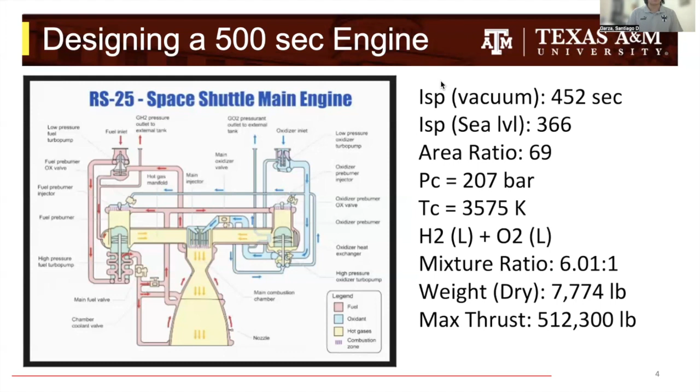Now, to help design this 500-second specific impulse engine, we used a rocket propulsion analysis software, and using the same mixture ratio of hydrogen and oxygen and maintaining the area ratio of 69 between the throat and the exhaust.

And it was said that we had to pre-burn the hydrogen and oxygen temperature to about 3,000 Kelvin, raise the chamber pressure to 500 bar, and raise the chamber temperature to 3,790 Kelvin. Now, even through all this, we were only able to achieve a specific impulse of 475 seconds, which means we need to find an alternative to increase ISP other than pressure and temperature changes.

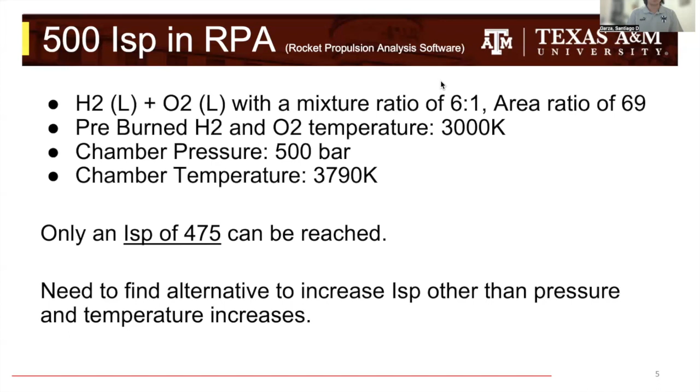So a little bit of background about the analysis we will be doing. A nozzle is defined as maximizing thrust by efficiently converting the high pressure, high temperature exhaust gases into high velocity exhaust streams. So a basic diagram of a rocket nozzle is shown on the top left.

Basically, we have stagnation pressure and temperature in the combustion chamber. And assuming we don't have any significant pressure changes or temperature changes or velocity values between the end of the combustion chamber and the beginning of the nozzle, we can assume that the pressure and temperature of the combustion chamber are at stagnation, and also are at the same stagnation values when entering the nozzle.

And so then the gases pass through the throat where they accelerate to Mach 1, and at these supersonic speeds, they accelerate even further due to the diverging section of the nozzle. And they will accelerate to a specific pressure at the exhaust and velocity as well as temperature. And depending on how these pressures and temperatures compare with the ambient conditions, that can help us understand the performance and efficiency of our engine.

Now, one of the variations of rocket nozzles that we chose to analyze is called the expansion deflection nozzle. Basically, what this means is that flow is deflected by a plug and is forced to stick to the nozzle walls.

And the presence of a free jet boundary to the expansion process lends a kind of self-adjustment to back pressure variations. Basically, what it's saying is that the way that flow behaves as it moves through the nozzle is dependent on what the ambient conditions are.

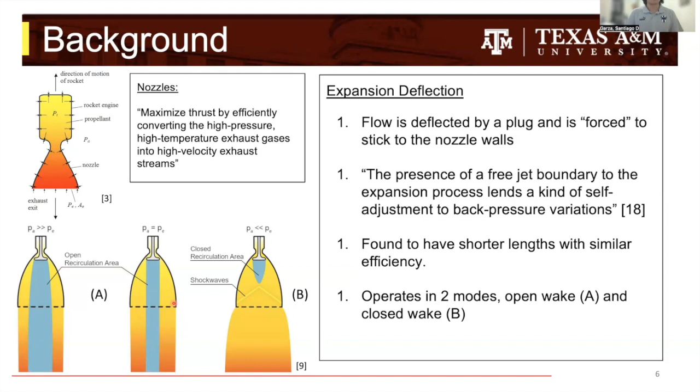So the objective of this research is to determine whether the expansion deflection nozzle can actually lead to a better design for a 500-second engine. We've decided to pull this component out because it appears that this is one of the easier components to change and implement and get an instant response and efficiency metrics.

So what we're going to do is compare the expansion deflection and bell nozzle performances for both a vacuum and then the expansion deflection nozzle at sea level. We're also going to investigate the effects of our specific pintle design.

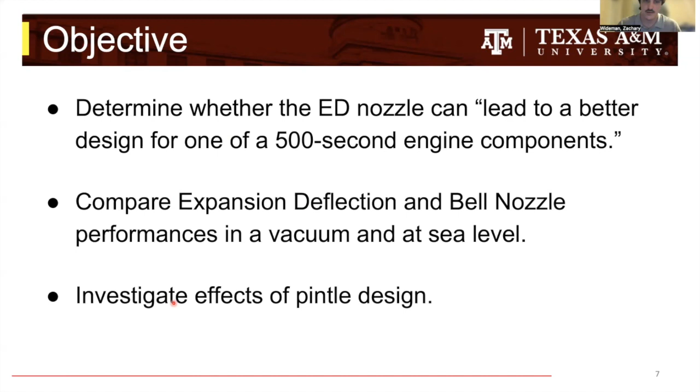As far as literature pertaining to the expansion deflection nozzle, one of the first analyses done was by Robert Wasko in a 1960s NASA report. Wasko determined the nozzle was not as efficient as expected, and in fact it was just as performant, as actually less performant than a conical nozzle at sea level and vacuum.

It was not altitude compensating, whereas a plug nozzle was. Noting that it was only operating in closed wake, which would explain that poor performance and lack of altitude compensation.

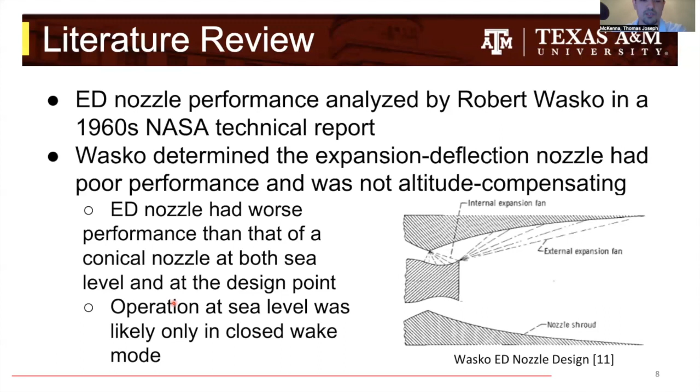However, in 2002, Taylor published his dissertation providing an exploration into different expansion deflection nozzle contour designs. In particular, he talked about the works of Wasko, Rao, and Mueller. Wasko and Mueller use very similar nozzle designs, as you can see at the bottom two in the picture. They have a very low throat angle, and they use an ideal contour.

Both of these nozzles operate in closed wake mode. They are not very efficient and do not provide any altitude compensation. Taylor makes note that it's not surprising that in his analysis, Wasko found that it was not performant and it was not altitude compensating.

In fact, he referred to the geometry as just peculiar and not allowing it to operate in open wake mode. Whereas - sorry, can you go back to the previous slide? Yeah, the Rao-type nozzle with the rounded pintle and the optimized contour would allow for operation in open wake.

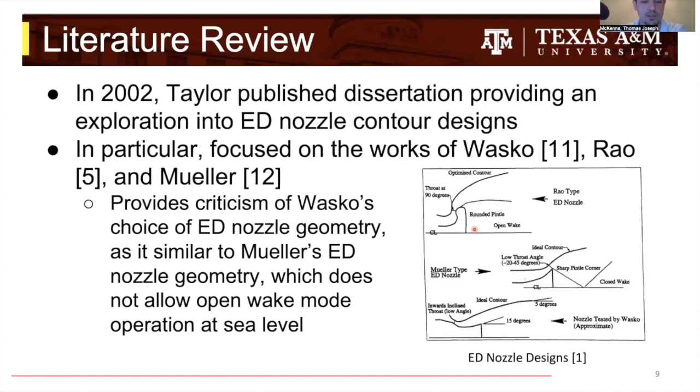In particular, the criticism Taylor had for the Wasko geometry was the low pintle separation angle. It was even lower than that of Mueller's geometry, which is why it was very peculiar. The throat was also considerably upstream from the point of separation, and all of this resulted in a decreased open and closed wake base pressure.

Overall, due to the fact that the Mueller nozzle was not intended to operate in an open wake mode, it's not surprising that the Wasko nozzle only operated in closed wake and was not performant or altitude compensating. So it casts doubt on the notion that expansion deflection nozzles are not performant or cannot be performant. In his dissertation, he talks about optimizing the contour to actually get it to operate in open wake and provide that altitude compensation.

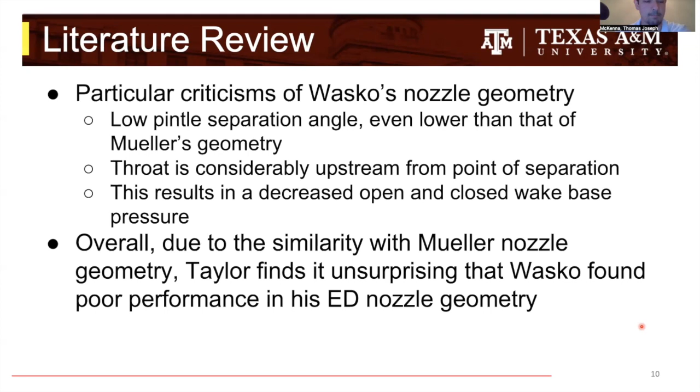As I said before, Rao is one of the design philosophies for the expansion deflection nozzle geometries. In particular, Rao utilized his established bell length optimization, so you could possibly reduce up to a 50% decrease in length, which could present a reduction in mass of the nozzle.

He made use of a much larger throat angle, about 75 to 90, all the way up to 90, which was much higher than that of the Mueller or the Wasko nozzles. Overall, what this would allow for is a longer operation in open wake mode.

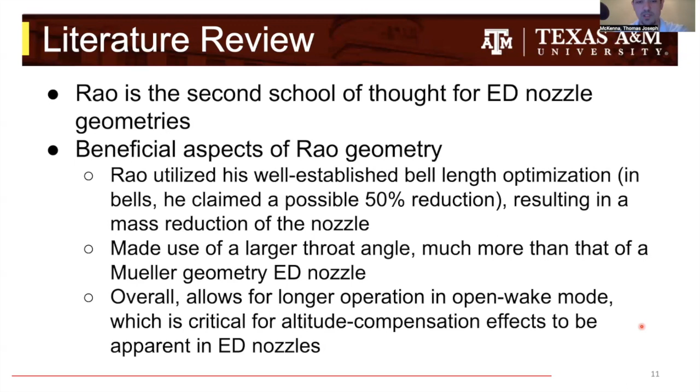And it is critical that this happens because the expansion deflection nozzle needs it to operate in open wake for there to be altitude compensation.

So our geometry methodology, this is our overview. We mathematically designed our nozzles in MATLAB and sketched them as a contour. Those contours were then imported as a collection of points into SolidWorks, where we could mold the model, scale it to its appropriate length and units, and then mirror it to get a full planar nozzle. That's where we went different from typical research.

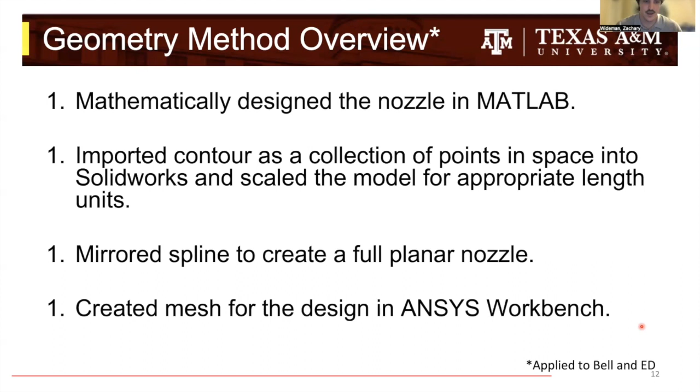A lot of previous research did axisymmetric CFD, whereas we're doing a full nozzle CFD. And then we created a mesh for this full nozzle in the ANSYS workbench.

So for our exhaust contour, we did a thrust optimized parabolic nozzle, which is a quadratic Bezier curve. Here it's shown from Rao, who approximated this. As you can see here, here's your throat, and then you come up to this endpoint, which is your theta n, the angle going into the curve, and theta e is your exit angle.

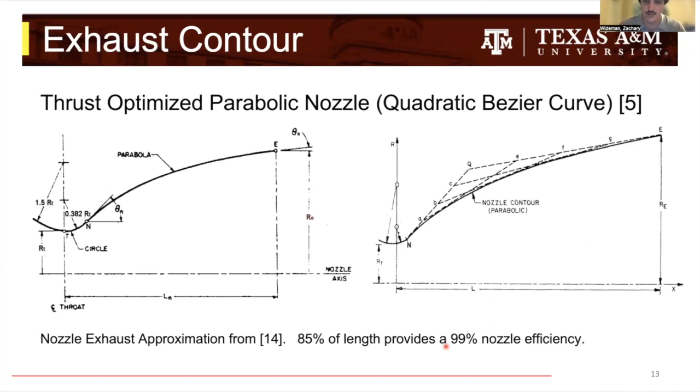What he found is that 85% of the length of a bell nozzle provides 99% of your nozzle efficiency. So we took that metric.

Here are the equations we generated our curve with. We know N points because we know the throat exit, and we know E from the length approximation given by Rao, and our throat area that we chose. The M1 here is defined by the tan of our angle going into N, and M2 is the tan of our exit angle. Using these equations, we can generate a curve.

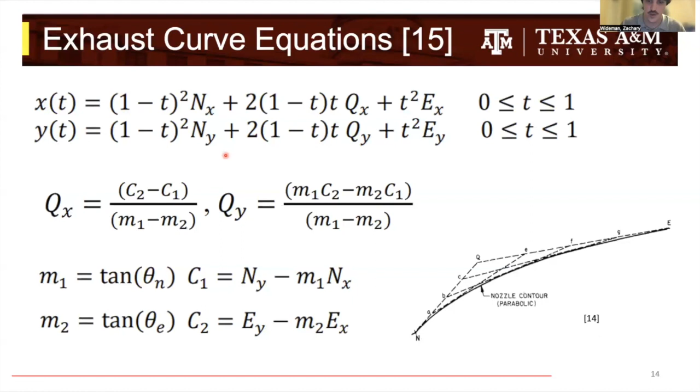So here's our bell contour design. As you can see here, the blue is our converging section, and then it goes into our diverging section.

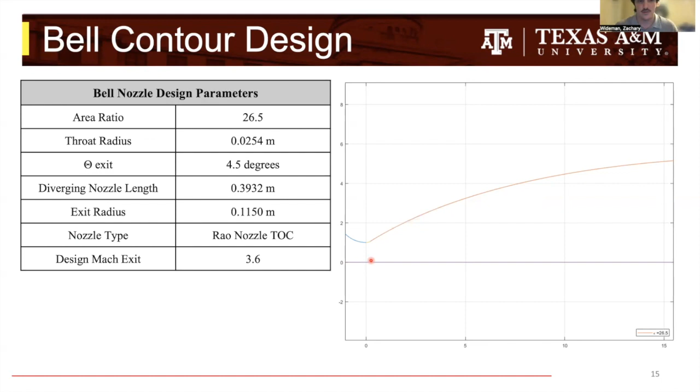Our area ratio for the bell contour is 26.5. The radius is 0.0254, our exit theta is 4.5 degrees, the length of the whole nozzle from the throat on is 0.3932, and we have an exit radius of 0.1150. The design Mach is 3.6.

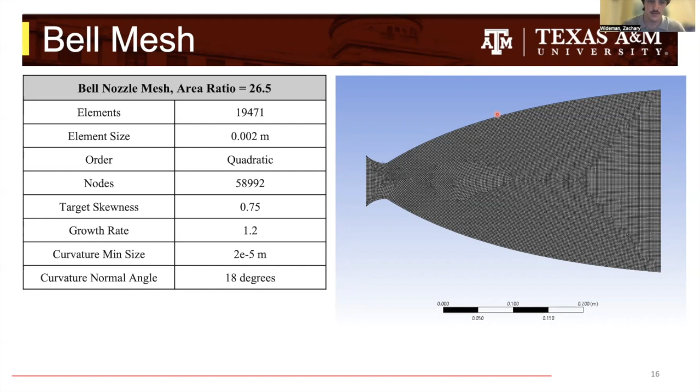So next, here's our mesh. This was created in ANSYS workbench, has around 19,000 elements, 59,000 nodes. It's quadratic elements, our skewness or quality was 0.75, and our element size is 0.002 meters.

And then for the expansion deflection design, this was a little more complicated. This image is taken from Taylor's dissertation. This is where we also took our optimal design, as we looked at his graphs of thrust coefficient for different radius of the pintle, radius of the walls, and these entry angles. That's how we designed ours.

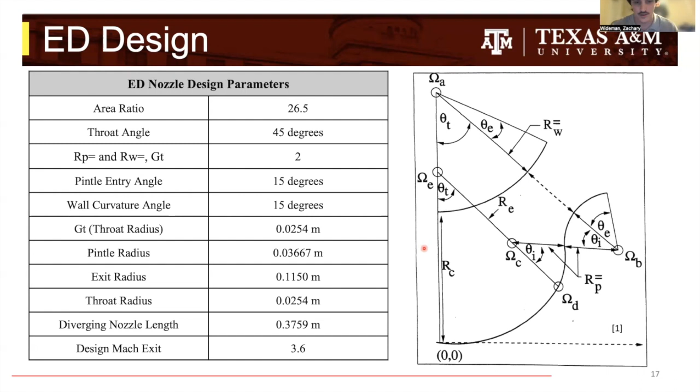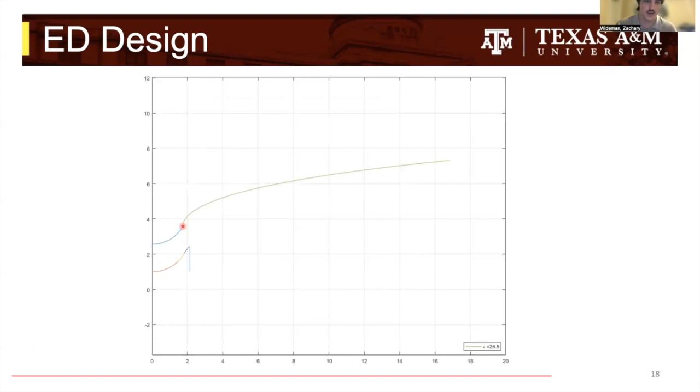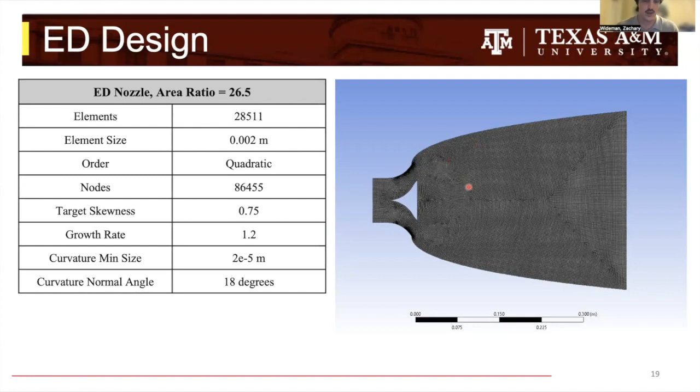So here's the expansion deflection mesh. As you can see, it's 28,000 elements, 86,000 nodes - again, all the exact same parameters as our bell nozzle essentially.

Next, we're going to move on to our methods overview. Our CFD was ANSYS Fluent, and we did a density-based 2D solver, which is the standard for supersonic flow. Our chamber conditions were 300 bar at 3000 Kelvin, which is very similar to a Raptor engine. For our fluid medium, in order to compare it to other works, we used air like they did as an ideal gas, and we used the Sutherland viscosity.

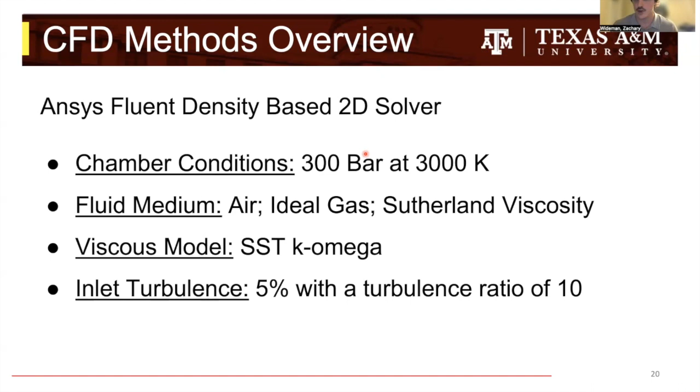And our viscous model was the SST K omega with an inlet turbulence of 5% with a turbulence ratio of 10. So that introduces a little bit of turbulence into the model.

So here is our CFD parameters. As you can see, we have our operating pressure at 0 pascals, inlet pressure at 300 bar, 3000 Kelvin, with our outlet pressures at 0 for vacuum and then sea level, and the same for our temperatures.

And quick mention, we ran 1,000 iterations max, or for the bell, when it converged early, we stopped it early.

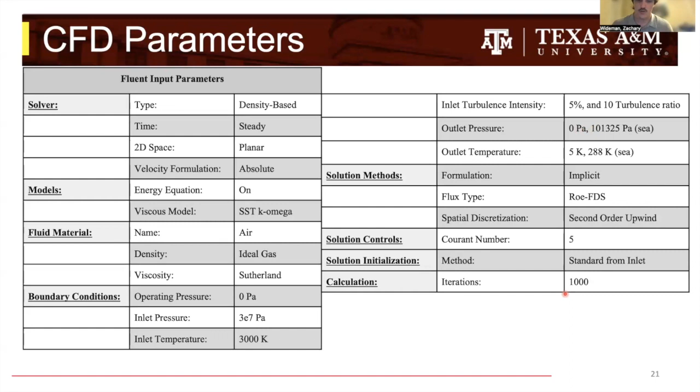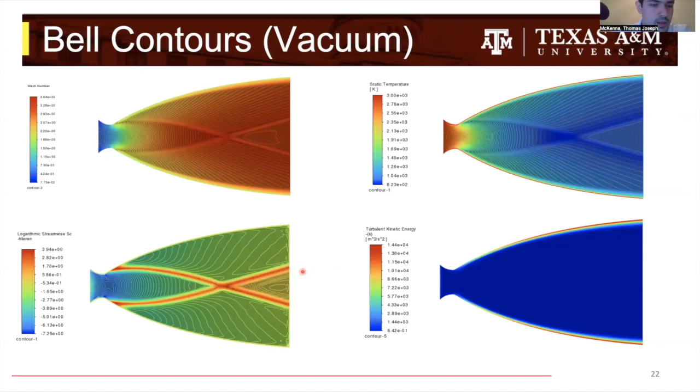Here's our bell contours we got using ANSYS for vacuum. As we can see, this is just a standard bell, nothing strange to see here. We have uniform acceleration throughout the entirety of the bell. We can see the shocks forming initially on the left side, and then meeting to form those on the other side. Next slide we'll have the static pressure and velocity.

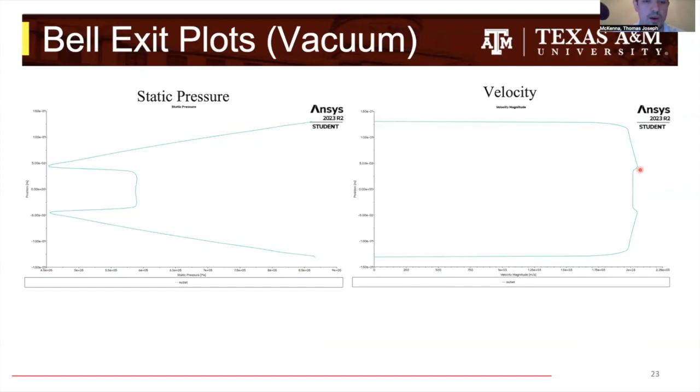Static pressure is going to be higher at the boundary layer, as seen in the graph, and then the peak on the left side there is going to be the area between those shocks. You'll see the peak in velocity on the right side as well, those are where those shocks are. You'll see that in the Mach pressure graph on the next slide, and yeah, you can see those peaks there as well.

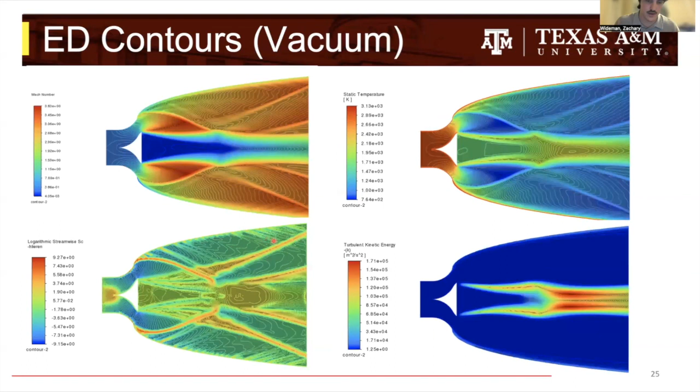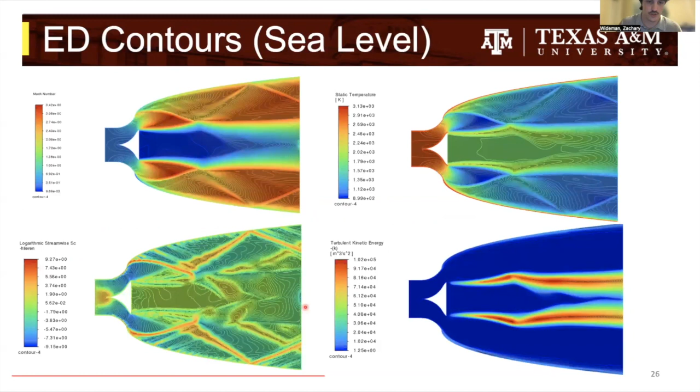Here these peaks are our shocks, and we'll show that in a later diagram. Then, of course, the temperature, that hot recirculated region is a lot higher. Here's our kinetic energy for sea level, so this is a very, very turbulent area coming out of the very center of it.

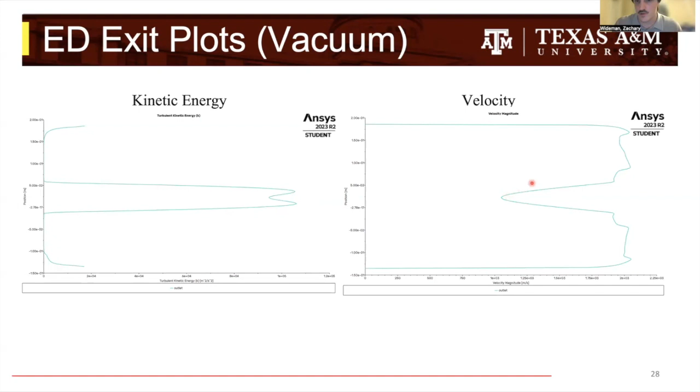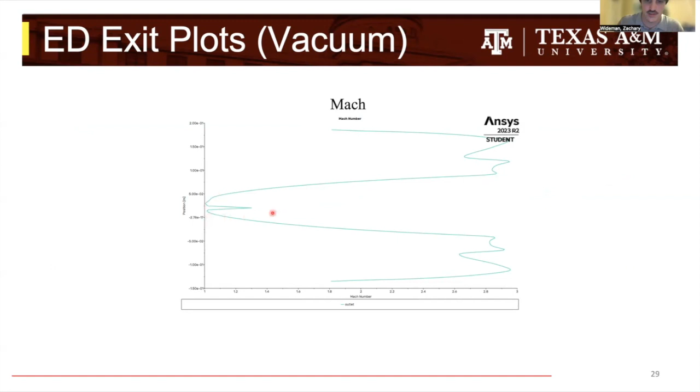You can see this velocity drop. Now it's not to zero, but it's a drop of 50% to 1,000 meters per second. Finally, here is the Mach diagram for the vacuum. As you can see, there's a massive Mach drop, but it doesn't go below one, it's still supersonic flow. Next are our plots for sea level.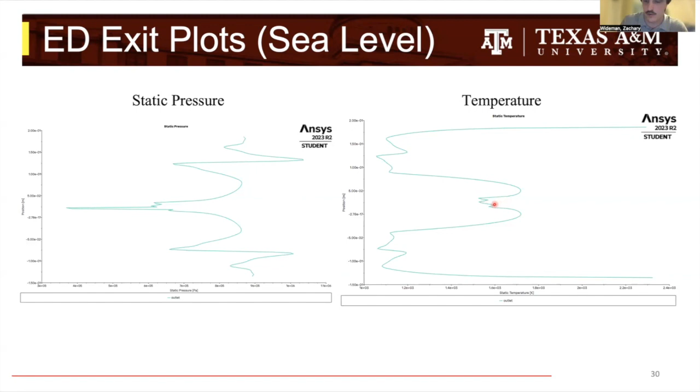These are very different, especially in the pressure region. As you can see, there's a massive decrease in pressure at the very, very tip of it, and there's also these high peaks from the shocks, but we don't get that same curve from the vacuum. Then the temperature, you can see this little in-between where it's still slightly open wake, and that's shown here with this kinetic energy, it's open.

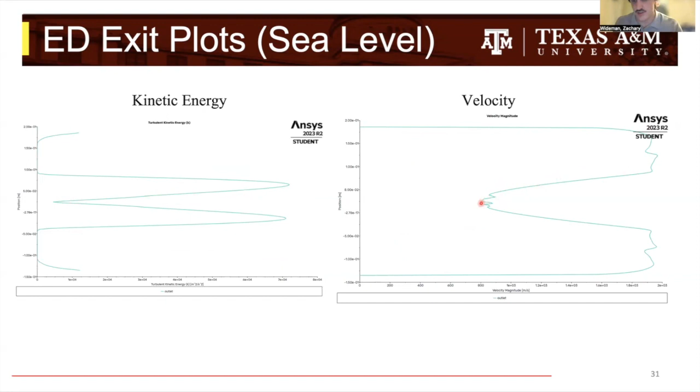Here's, of course, our velocity dip, which is greater at sea level. This goes down to 800 versus 1,000. And then here's the Mach plot.

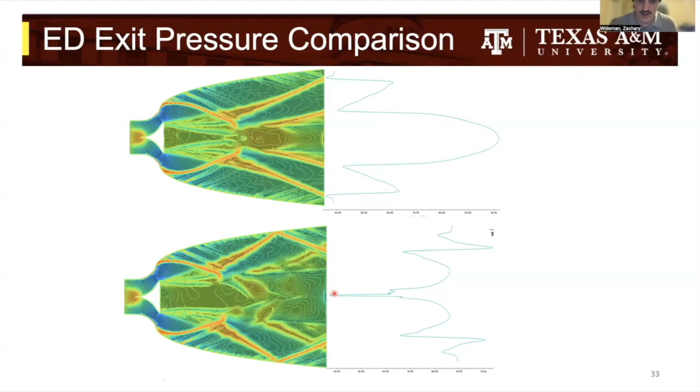Okay, so now we are going to conduct a quantitative comparison of the different performance values of the two nozzles at the various ambient conditions.

So we created these two tables that highlight the different values we generated as well as the calculations we made. The first thing I'd like to point out is that the effective area of the expansion deflection nozzle increases with altitude. The first two rows are vacuum and the last two rows are sea level. If we look at the expansion deflection effective area, we start off at about 0.0323 meters squared, and it increases to 0.039 meters squared. So we can see there is definitely an increase in the effective area with altitude.

And this was achieved using a shorter nozzle. If we look at the effective area of the bell, it stayed pretty much the same, whereas it had a longer length than the expansion deflection nozzle. So this provides evidence that by using these expansion deflection nozzles, we can get better performance of the flow at shorter nozzle lengths, which we can then use to reduce weight.

Now, we also have in the second and third column the pressure at the exhaust and the velocity at the exhaust. If you remember back in the plots, it seemed extremely noisy, and therefore you may ask, how exactly did we generate these values? Well, a lot of the peaks were a result of shocks, but the variation between them actually seemed quite linear.

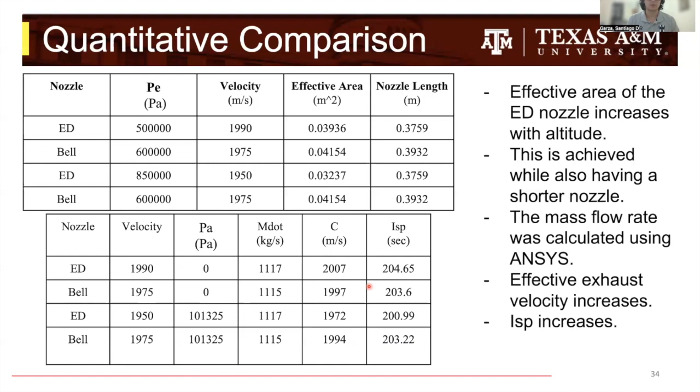So now looking at the actual percent difference to get a better comparison, we see that the expansion deflection specific impulse between a vacuum and a sea level increased about 1.78%. The variation of this specific impulse is not as high as expected, but it does demonstrate the larger increase in specific impulse of the expansion deflection nozzle versus the bell nozzle, because from sea level to a vacuum, you get a 0.18% higher specific impulse in a vacuum for the bell nozzle.

Now, one thing we would like to point out is that the specific impulse of the expansion deflection nozzle surpasses that of the bell, because at sea level, we start with a lower specific impulse for the expansion deflection nozzle of about 1.1%. Whereas once we reach a vacuum, our specific impulse in the ED nozzle is about 0.5% higher.

So another thing to point out is that these percent differences across the board when comparing the bell and the ED nozzle, we see that the specific impulse of the ED is able to keep up with that of the bell. So even though the design is different and the flow behavior is different from sea level to a vacuum, the ED nozzle still generates values that allow the specific impulse to keep up with that of the bell. And we can further be more confident in this because even though the ED is not optimized, it already does demonstrate superior performance than that of the bell.

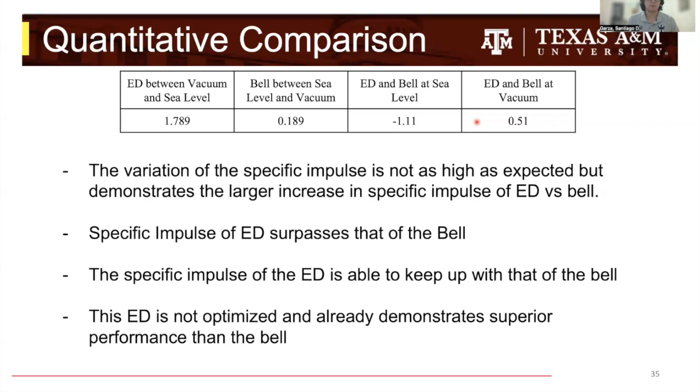So I'm going to talk a little bit about application as well as how we can further apply this work. The first is that we must conduct a further investigation in how to identify optimization techniques of the expansion deflection nozzle diverging section. What I mean by this is that because we use the quadratic Bezier curve to have boundary conditions that match that of the bell nozzle, it basically became more horizontal than we would have liked, which means that the effective area was not able to increase as much as we could potentially see had the nozzle been a bit wider.

So further investigation is required to basically identify how the behavior of the effective area changes as a result of a wider or shorter nozzle for the ED, as well as how we can control that change in effective area, in terms of also how long the nozzle actually is.

Now, another thing we proved in this study is that the use of the molar pintle will not generate the increase in specific impulse due to the turbulence it generates and the closing of the wake. As we mentioned before, at sea level, we have an almost closed wake caused by how almost vertical the expansion fans are in the molar pintle, and basically this closes the wake prematurely, so we are not able to really control the wake. And because of the turbulence it generates, we also cannot measure too well how much we can optimize the performance of the nozzle.